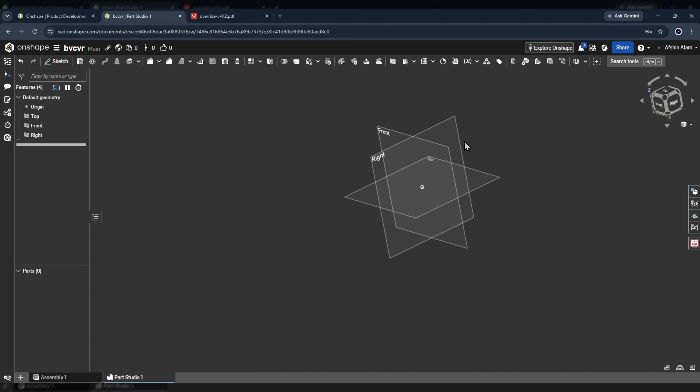So as you guys probably saw, we're making a basic ramp in Onshape. To do that, essentially we want to start looking at it from the side, so I'm going to start from the right side and create a sketch.

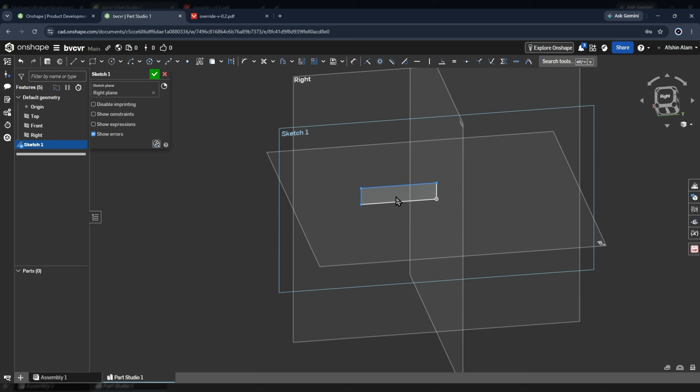From there, we want to start with essentially the base plate for how the plastic is going to mount to something. There's different ways to do this, but to start, I'm just going to have it mount on this little rectangle, and then from there we can have it mount to a little piece of metal below that.

For that, say we want this to be one hole wide, so then we can just set this to 0.5, because typically when you have a singular hole, you want half an inch of material around it. Then we can set this to the plastic thickness, 0.063.

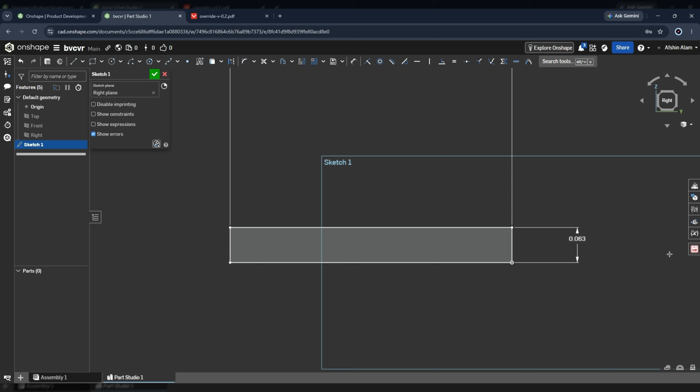And then from there, we can utilize our curves. For this, we want a curve kind of going this way because we want the game piece to go up kind of like that.

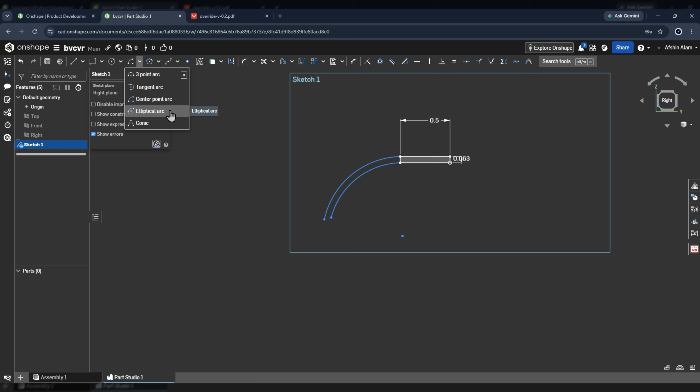So we can set our curves, and I usually like to use the center point curve for this. I find that that's easiest and nicest to use, but there's a bunch of curves over here: 3-point, tangent, center point, elliptical, conic. You could also use a circle and then just cut the circle. Whatever you guys want to use, but as I said, I like to use center point - it just looks nicest to me.

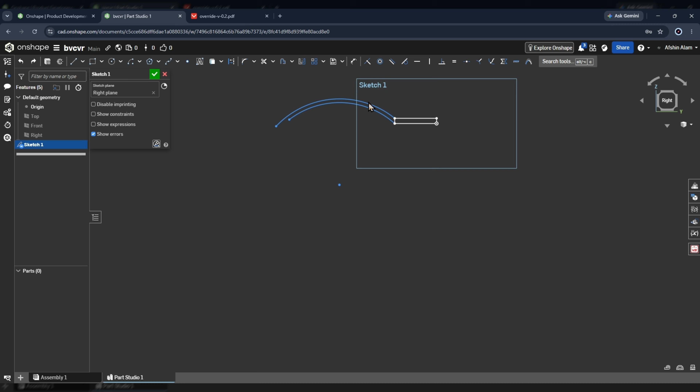From there, I would make this tangent so that it comes into a line. Before, if you look at it, no matter what, we can move it in a way where it would come over that line, which is something you could want for other ramps. But for this ramp, for example, I'm gonna have it so it comes straight into that line, so we can use our tangent tool for that.

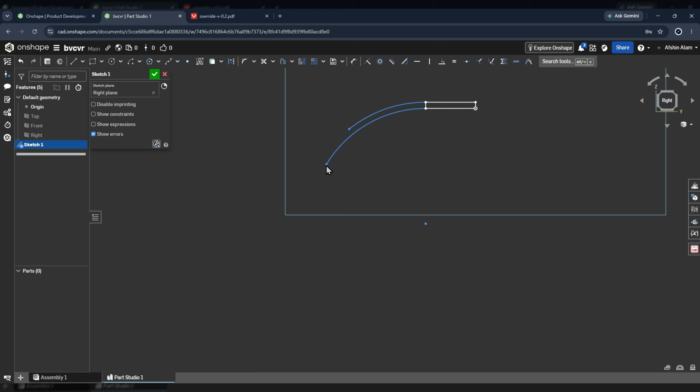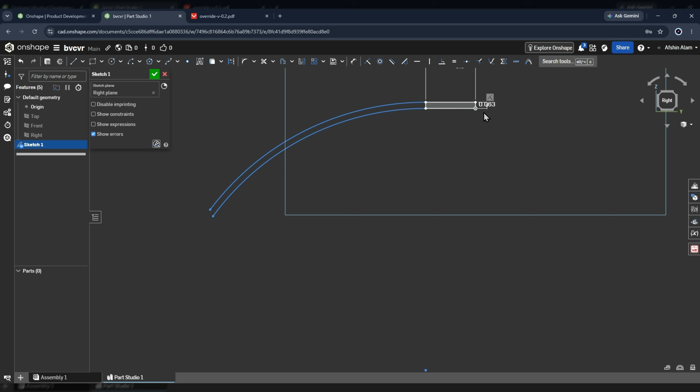Now that we have that tangent, we want to set exactly where we want our ramp to start and end. You could just move this freeform however you want and set this, especially if you're editing in context. If you guys don't know how to do that yet, a video will be linked in the top right, check that out. But just for now, since we're not editing in context, we're just gonna set the length and distance based on numerical values.

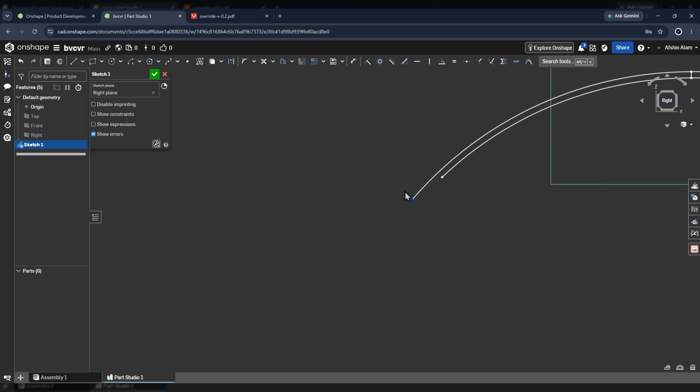So we can go here and say we want this to be an inch down, and then we can set it to be, say, 3 inches forward. So now when it creates the ramp, the ramp will look something kind of like this, and this lets you envision it before you actually start bending or cutting plastic.

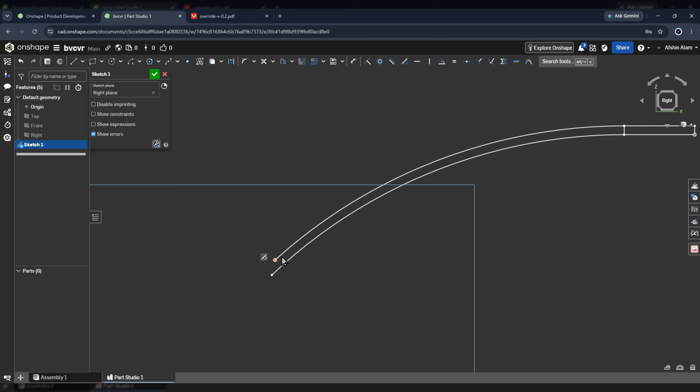Because one thing, when you bend plastic, it's really hard to bend it back, so typically you want to know exactly what you want before you start bending. But anyways, now everything is white except this little blue dot.

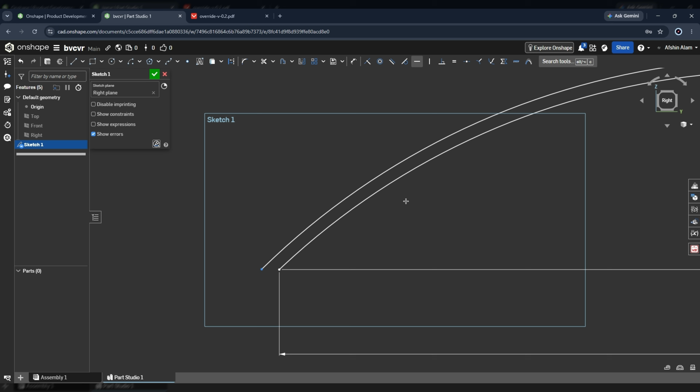So now we want to set exactly where we want this to be. While you guys could set it anywhere along this curved path as you want, you could think of this as essentially the top of the plastic. So what I usually like to do is set this horizontal to this one - you can use that by clicking H for the hotkey and setting that.

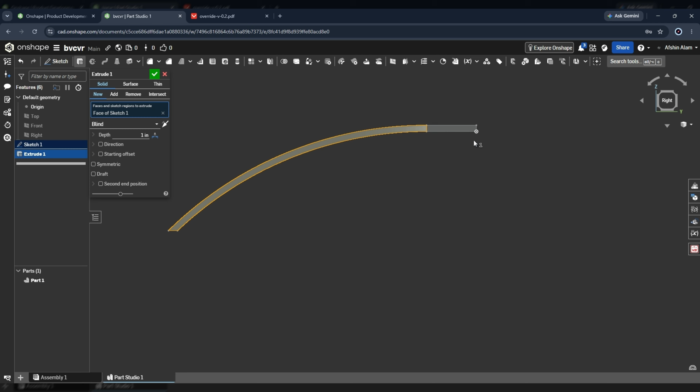Since there's no gray inside, you have to close the curve, which means putting a line at the end so it makes an actual shape. Now that it's closed, everything's white. We can check mark, click Shift E to get the pop up for extruding.

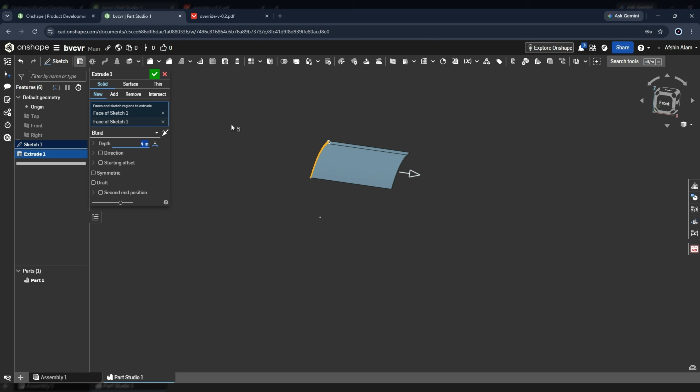Now we can extrude it as much as we want. For this example, we'll extrude at 4 inches, because if we look at the pin specifications, the diameter is about 3 inches. So you want your ramp to be something like 4 inches or 3.5 inches, just to encompass all of that while not using too much plastic. From there, you just click check mark and you have a basic ramp.

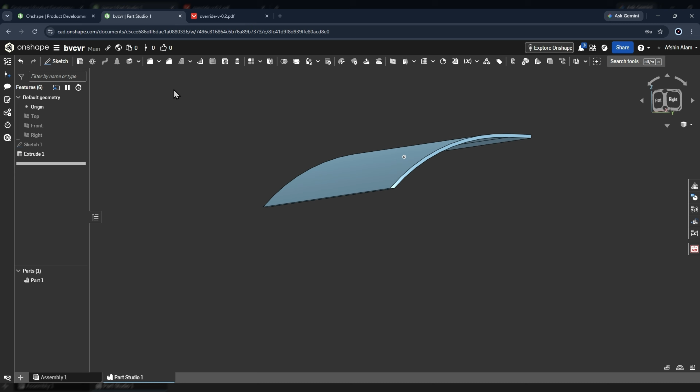From there, we can show you some more tools. We can curve this point, which will make it easier for the ramp to go up. There are a few tools you can use here, like the chamfer tool, which won't curve it per se, but will create a little angle.

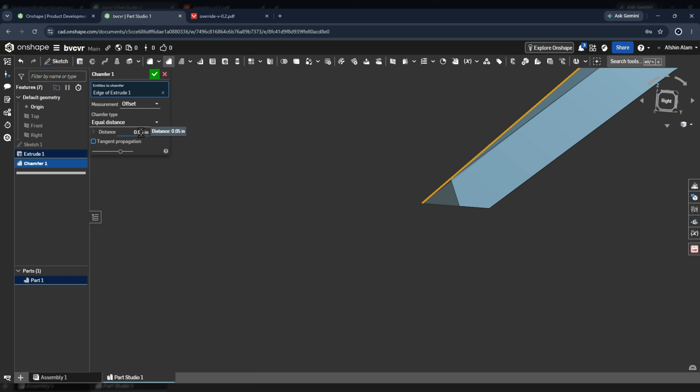So if I say 0.1 or 0.05, you can see it creates a little angle, but that doesn't really help that much. So instead, we can use a fillet, which creates a small little curve.

This is something you usually want to do at the ends of all your pieces. So usually when I'm making a piece, I would fillet the end there, fillet the end there, and then make that look nice later.

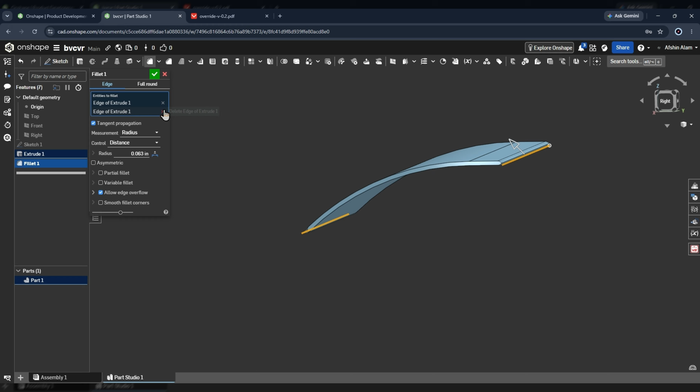For now, we're just filleting this end, and we can set this to 0.0625, which looks good. That'll essentially create a little curve, so when it goes up there, instead of hitting that edge, it will use this little curve to more easily go up.

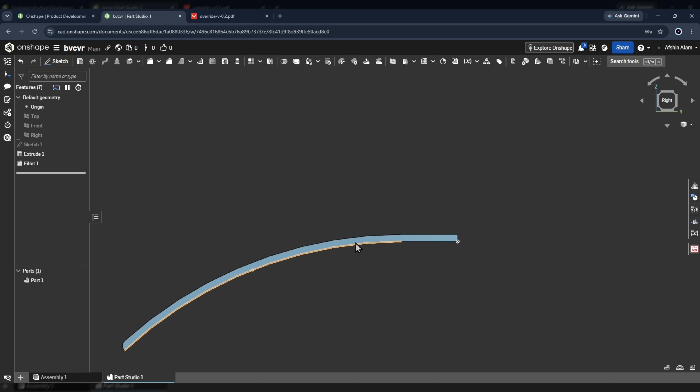Now that we have that, the last thing we have to do is make the holes in the actual piece to mount. So I'm going to create a sketch up here. While you could use circles and cut them out, I like using the hole tool. First you'll find the center.

That's the center of this line. You can see it by the little yellow square, and then the center of this line. So then we want to see where they meet, and it'll automatically show. Now we have that.

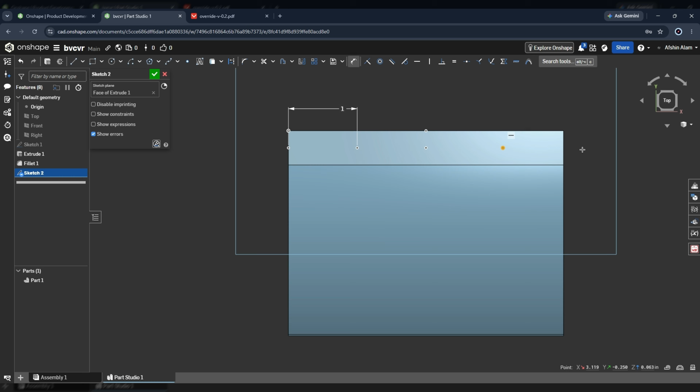Say we want to make 3 holes. So we'll have one hole an inch away from each of the sides, and each of the other holes one inch apart as well.

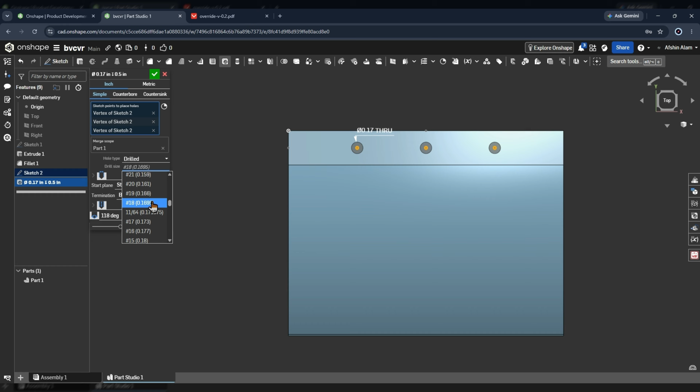Then we can use our hole tool, and use this exact size of hole. Keep in mind, this one is the exact size for drilling for screws. If you're looking to do shafts, I believe it's #16, but this one will exactly fit the screws. So we click check mark, and now we have our holes and our fillet.

So this is a basic way to create this ramp.